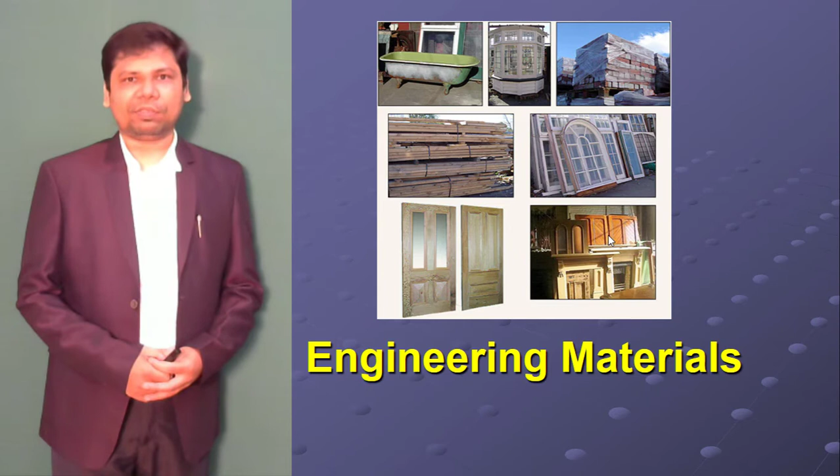Today I am teaching the first topic of the first unit, engineering materials. In this lecture, I am giving the classification of engineering materials and a brief overview of those classifications.

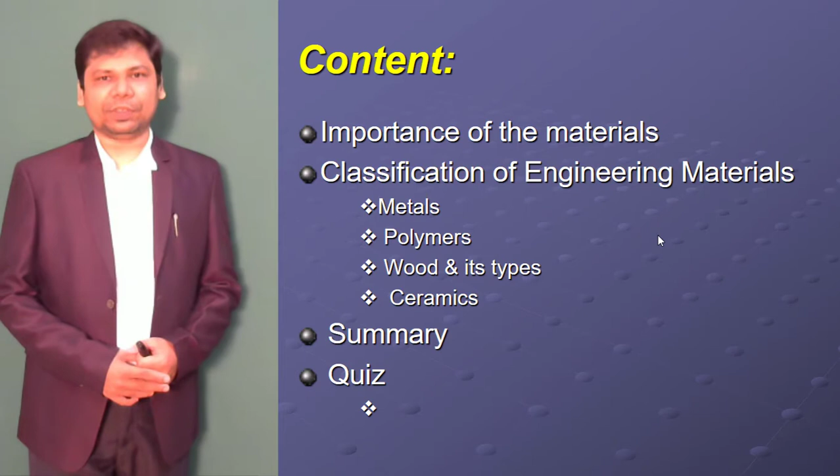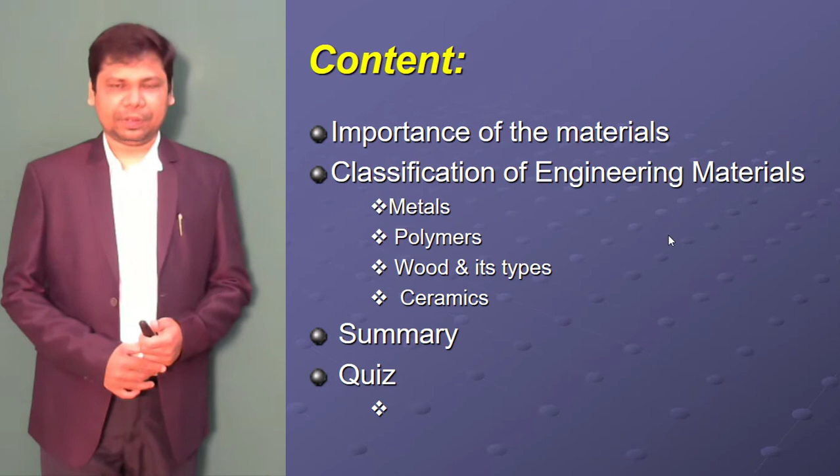The content of this lecture will be as follows: the importance of the materials. I am going to discuss the material, its existence, its importance and its role in the industry, and what present challenges there are in the case of engineering materials. We will also classify engineering materials, and I am going to discuss only metals, polymers, woods and various types of woods, ceramics, followed by a summary and quiz.

First of all, everybody knows the materials. In our day-to-day life, we are using so many varieties of materials. It is very difficult to imagine human survival without the use of material. The material may be anything, it can be any shape and any mode. The material may exist as a solid, a liquid, or a semi-solid also. As a human, what we are seeing, touching and feeling is simply called a material.

The list of materials in our surroundings is very big. I am not talking only from the engineering point of view; it is a general concept I am teaching to you. The clothes we wear, the taps, the electronic gadgets we are using, and the things you are seeing in your surroundings, everything is man-made. Once it is man-made, then definitely one medium is required, and that medium is nothing but a material.

Just think in this manner. If you are an engineer, and moreover a design engineer, you have some new techniques. You want to introduce new technology, and to bring the technology into the real world some medium is required, and that medium is nothing but a material. The material gives its shape. The material gives reality to your technology.

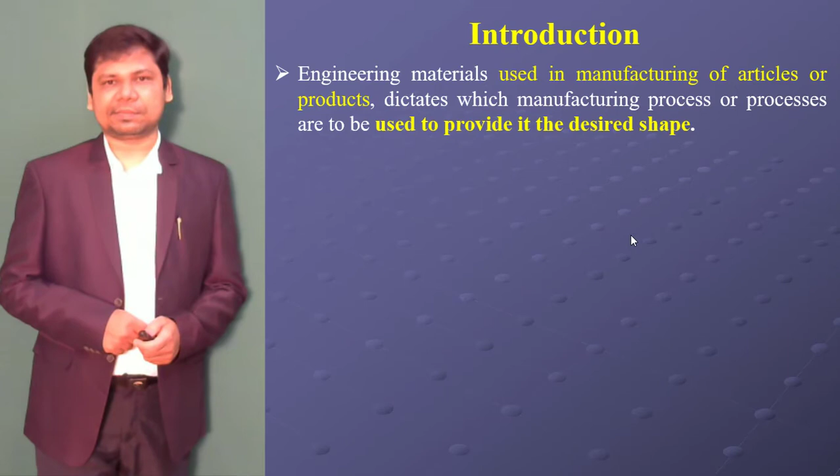Here we are not talking about any particular process, but pay some attention here: whatever product is manufactured in the industries, some process is applied on the material. The process may be heating, or melting and solidifying, called casting. The process may be simply a bending operation, a shearing operation, or powder making and compacting. So many technologies are available nowadays for the manufacturing of products.

And as an engineer, your job is to decide what process is required and what material is recommended for that product.

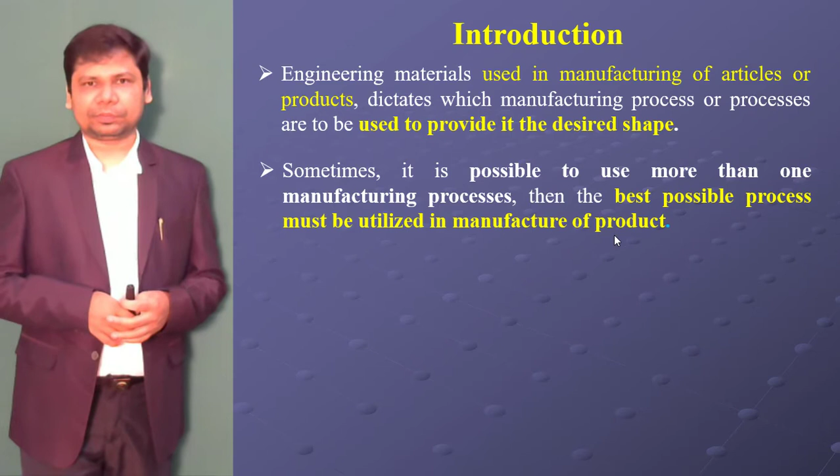If you are simply using a pen, the pen is a product. I am just showing this pen as an example. Now think about what type of material is used. Some may have metal combinations or alloy combinations, right? Most of them will have plastics. Plastics have different categories and different types. So here, your job is not only deciding what type of manufacturing process, but also what type of material is required for the manufacturing of the product. You have to decide.

And moreover, the availability of the material and its cost. A general question I am raising here: why are diamonds costly, why is iron cheap, or why are some materials called precious, and their costs are very high? Because of their availability. Now as an engineer, your task is that whatever product you are going to manufacture should be low cost. Only then will the product be used by a large number of people. If the product cost is more, then it is limited to only a few categories of people.

Now, how is the cost of the product affected? It depends not only on the technology, it also depends on the material it is made of. And moreover, the availability and its cost directly decide the cost of the product. One of the objectives of manufacturers or industries is to get some profit. Without profit, they will not release any product in the market. So when they count the profit, first they calculate how much was invested to make a single product. If the material is costly, it is taken into account, and when the finished product is finalized, the cost will be very big. So as engineers, we have to decide what its cost is.

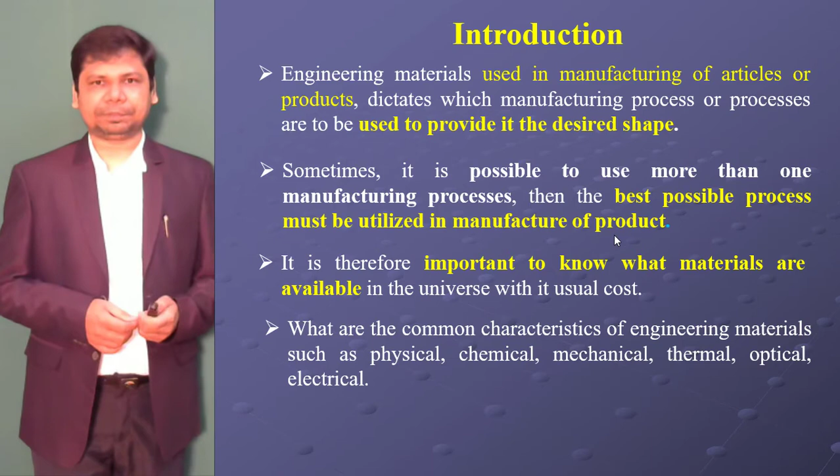Ferrous, I think you remember from your 12th standard, is nothing but the chemical name for iron. Iron we call ferrous. Based on the iron content in the material, they are divided as ferrous and non-ferrous. Ferrous means the major element in that material is iron. Major means you may consider it above 90%. In non-ferrous materials, the iron content is much less, or sometimes there is no iron. So ferrous materials means the major contribution in that material is iron, represented as Fe, and it is more than 90%.

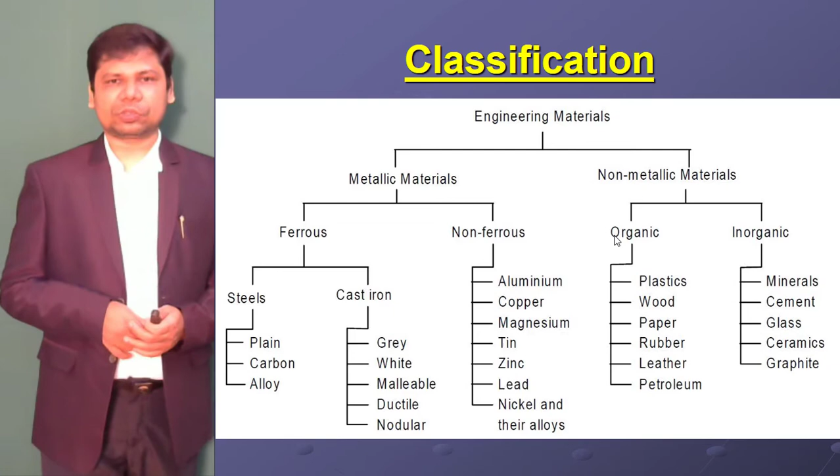So once the classification is completed, the next few slides will show you about these materials. Before going into steels, cast irons, non-ferrous, organic and inorganic, one thing to mention is the present real-world situation: on earth, whether natural or man-made, there are more than 70,000 different kinds and grades of engineering materials available. The list is going high day by day, increasing.

Moreover, the difficulty for engineers nowadays is to decide the right material for the right application. Yes, there is definitely a big advantage when you have a lot of combinations and varieties of materials, but as an engineer you must decide among that group which material is suitable for your application - whether it's space technology for making satellites, what material do you require? Or naval seashore explosives, what material would you recommend?

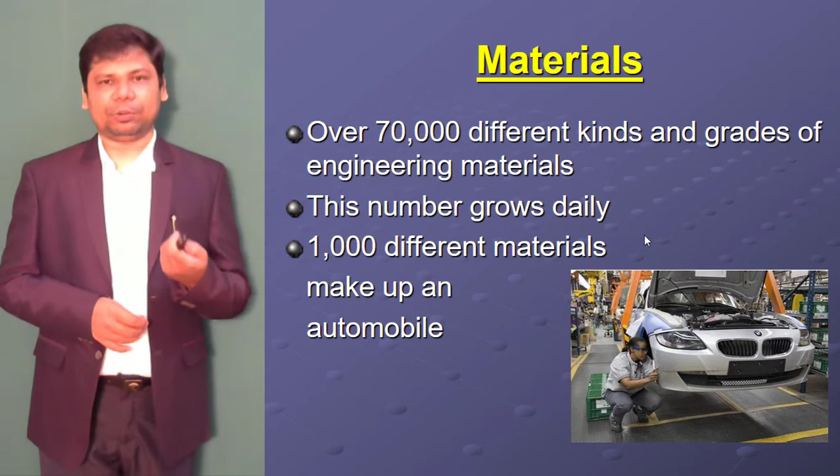So once again, summarizing: on earth, as engineering materials, there are so many varieties - not only steels and cast iron, but all categories of materials. The list is day by day increasing gradually, with more than 70,000 materials available from an engineering point of view. As an example, in automobiles, 1,000 varieties of material combinations are used, maybe plastic or different alloys.

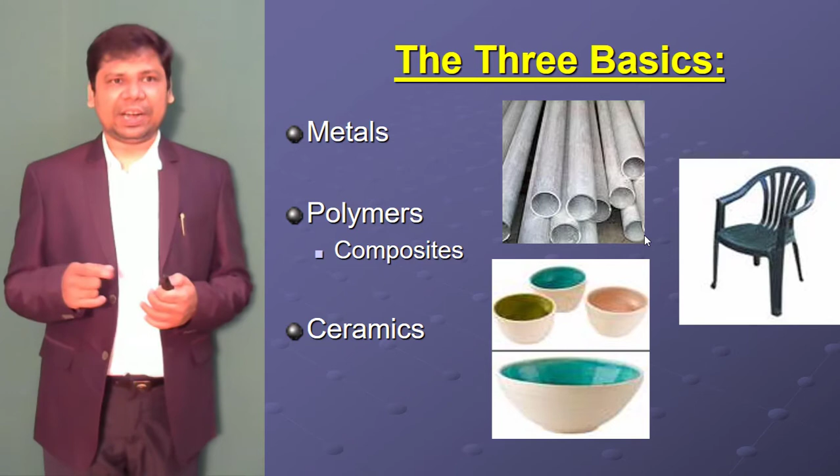Now the next coming slides are about a generalized example, so play around in a relaxed mode and think about these things. We use regular items in life, but we don't always know what material they're made of. There are three basic materials I'll talk about now: metals, polymers/composites, and ceramics. Whatever pictures you see, all come under one of these categories - ceramics, a plastic chair, or metal pipes.

What I'm mentioning is that to make a product, the required material type is not directly available, so we process the material - melting it and converting it into a suitable shape. Metals, physically, are denser, stronger, and harder materials. That is the nature of metal itself.

Cast iron and steels - we will talk about various types of steels in this course: low carbon steels, medium carbon, high carbon steels, high speed steel, tool steels, stainless steels. So many varieties are there, which we'll discuss in the next class. Cast irons and steels come under metals only.

The steels also have a combinational set, like alloys. Steel is an alloy of iron and carbon. Brass is an alloy of copper and zinc. You've heard of bronze - bronze medals received by so-and-so person in so-and-so event. Bronze is made up of copper and tin. So all these things come under metals.

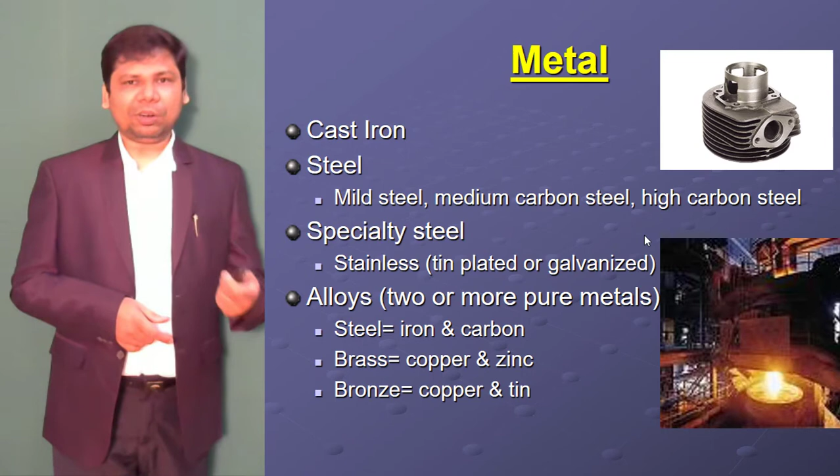The next one is polymers. Tables, chairs, leathers - all these come under polymers. It is made up of natural material, called animal cellulose material. In the case of synthetic material, there are two types: thermoplastic and thermosets.

What do you mean by thermoplastic? Thermoplastic means whenever you heat it, it will become saggy - it will deform. I can say it permanently changes size and shape. It will sag off. But thermosets, whenever you heat the material, become rigid and strong due to heating. So it's quite the opposite thing for thermoplastic and thermosets.

In thermoplastics, due to heating, it changes size and becomes deformed, like a melted portion. With continuous heating, the plastic will be thoroughly melted, making drops or different shapes, reducing it to shape. Whereas in thermosets, due to heating, all the thermoset plastic particles close together and become one strong, unique body. With heating, the hardness increases.

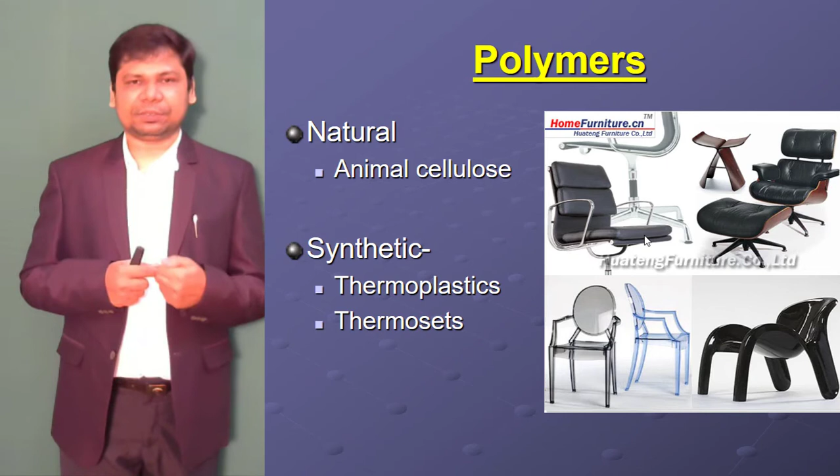The next one is natural composites - what we call timber, which is nothing but wood. There are hardwoods and softwoods. The name itself mentions 'hard' - the nature of that wood is very hard, whereas softwood is very soft. If it's hardwood, you have to apply more force when making the product.

The product may be a table, chairs, racks, or partitions, or any other kind made with the help of wood. With softwood, of course, we have to apply less force and energy. We will talk much more about softwood and hardwood in Unit 1, in the case of carpentry.

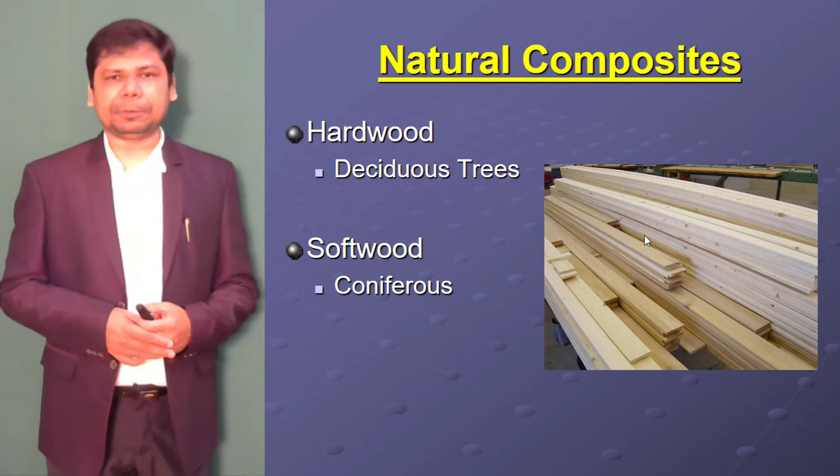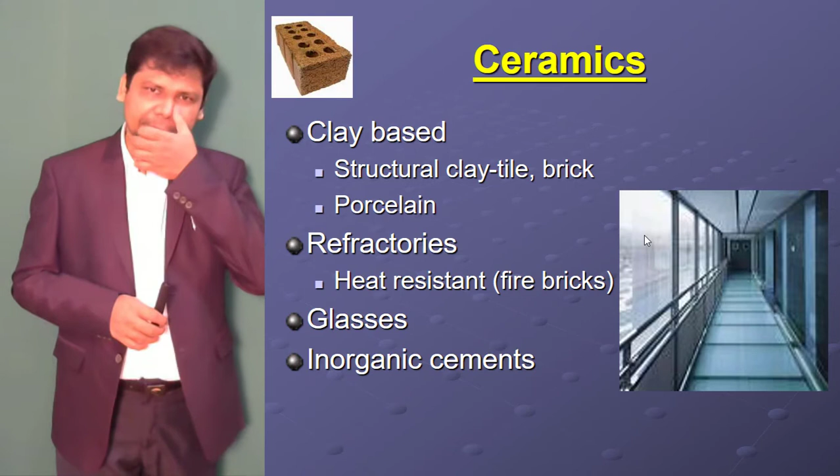So far we've seen metals, polymers, and wood. The next category is ceramics. Ceramic is quite the opposite of metals - ceramics are very shiny, and there are ceramic bowls and ceramic structures shown here. Ceramic has heat-resistant material, and it is brittle in nature.

When I name a particular ceramic, I'm just wrapping up what its nature is and what its properties are. You should also learn in this way - whenever we read about any particular type of material, we have to know what it is, what it looks like, and what its properties are. Only by knowing its existence and properties can you be the right person to decide what type of material is suitable for your application.

And here the ceramics, it may be a clay-based structure, bricks, or it will be like a refractory material. Refractory means heat-resistant materials. It may be glasses or inorganic cements. All these come under the ceramic group.

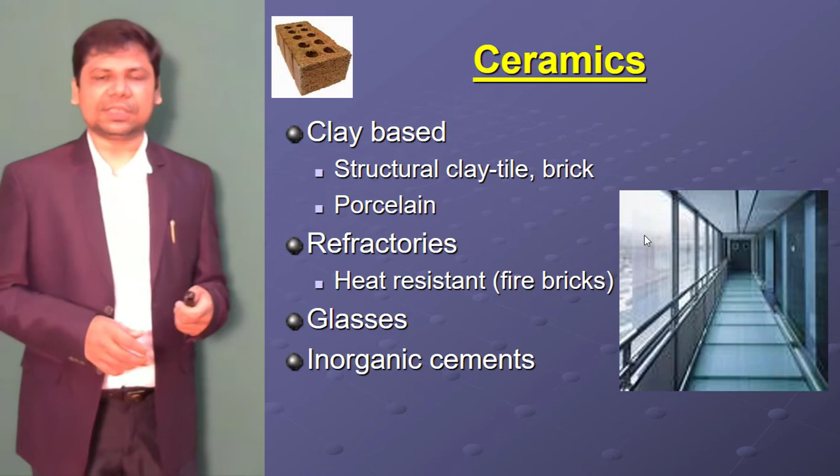And what I mentioned about softwood and hardwood, I am briefly mentioning one point. We will talk much more about this wood in the second unit of the content, about the properties and the differentiation.

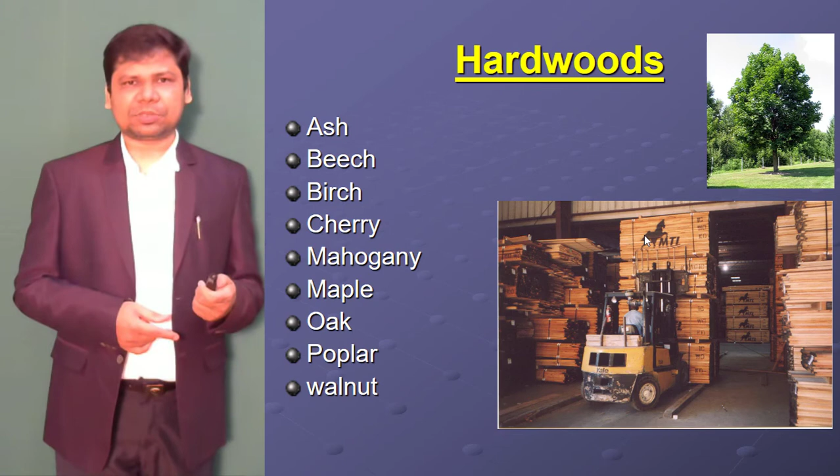Hardwood trees include ash, beech, cherry, mahogany, maple, oak, poplar, and walnut. All these come under hardwood. And similarly, softwood includes cedar, cypress, pine, and redwood.

Don't think only these are the classifications, the list is very big. Scientifically, on earth, more than 30,000 varieties of plant tree types exist, but here we are talking about only a few categories.

A few more categories exist in our Indian region, like in the Himalayas called Deodar, and the mango tree, all called mango wood. These are different types, and this list shows a worldwide point of view.

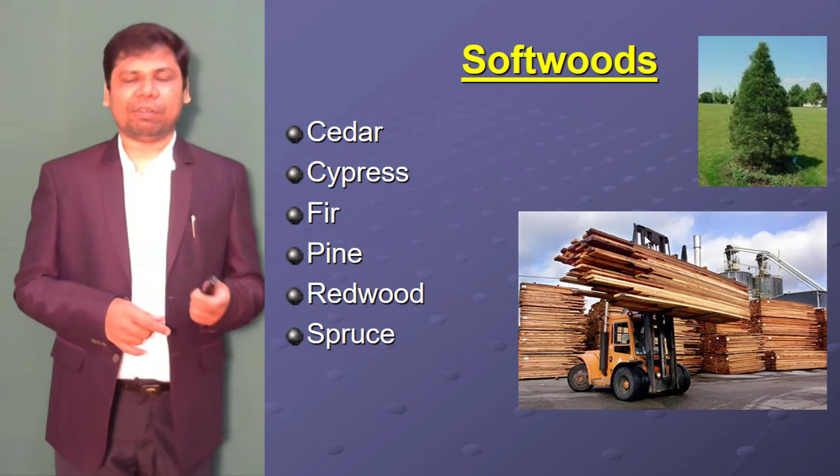Another man-made product, not only chairs and tables, but one of the most important things is plywood manufacturing. I am choosing these examples to explain the introduction concept in engineering materials.

You are already exposed to this material about woods and use it daily. If I talk about automobiles, shipbuilding structures, or space technology materials, you may not relate as much. That is why I am using wood to give an introduction.

So in making boards or plywoods, we use laminated beams or particle boards. Whatever nature gives us as wood, we arrange and align it for these laminations.

Wood is a cellulose material with a fiber structure. The fiber means a very thin, long section where the diameter is negligible, like human hair, which is one long fiber.

The fiber arrangement is different in woods. The cellulose material fiber is different, and we arrange those fibers perpendicular together in laminations to make it stronger. That is what happens in laminated plywoods.

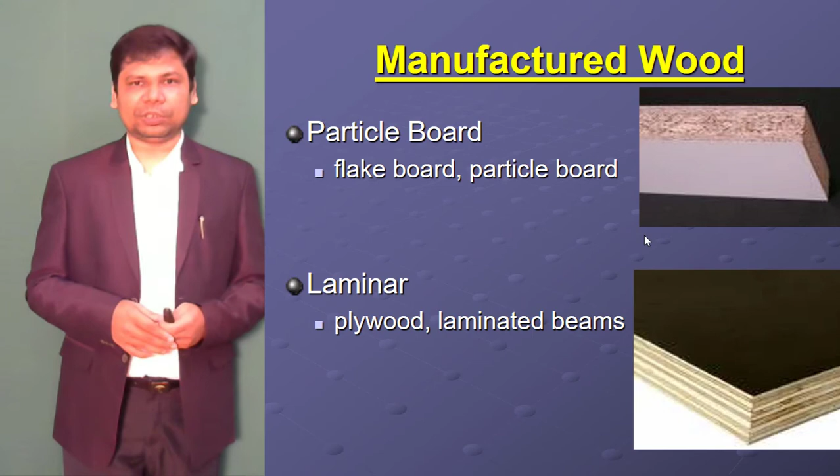So I am summarizing this. For the last 30 minutes I talked about the classification of engineering materials, grouped as metals and non-metals. Metals are ferrous and non-ferrous, and non-metallic materials are organic and inorganic. I described the importance of materials and their various applications.

And the role in industry, and selection, why selection is important based on the existing number of materials. If you do not select the proper material, your design is a failure. So material engineers play a key role in the development of a product.

A simple example, the Tata Nano cars. Earlier, a few years back, Tata engineers and scientists, especially Ratan Tata, were thinking about launching a nano car with the price fixed at about 1 lakh to 1.5 lakh.

To achieve that, what type of materials were recommended? At that time, huge automobile manufacturing plants had a minimum cost of 3 to 4 lakhs, and they wanted to change that basic parameter and reduce it further. That means not only design and elements, but material also plays an important role.

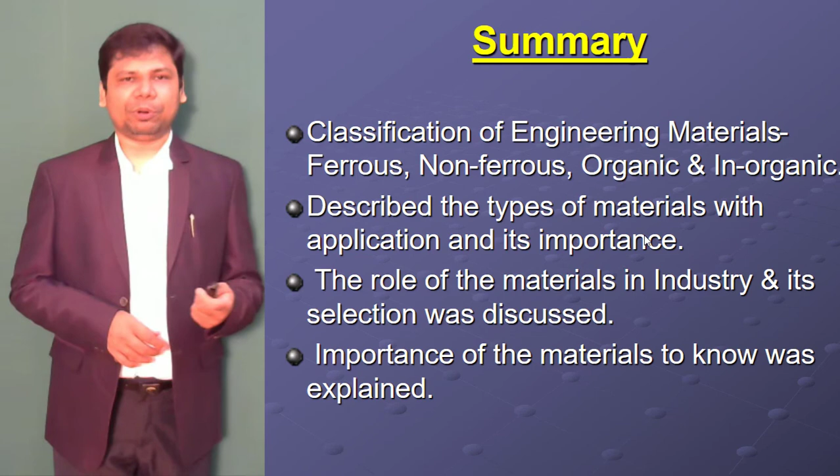And finally, we talked about the importance of these things. From this lecture, just take note of how much it is understandable to you by addressing these questions.

Just answer it: steel materials come under blank, and aluminum, copper, and zinc come under blank. The first two are asking whether it belongs to ferrous or non-ferrous. Also name a few trees which come under hardwood. What is the difference between thermoplastic and thermoset? Brass is an alloy of blank. And the glass material comes under what category of group? Try to answer these and check your solutions from this lecture.